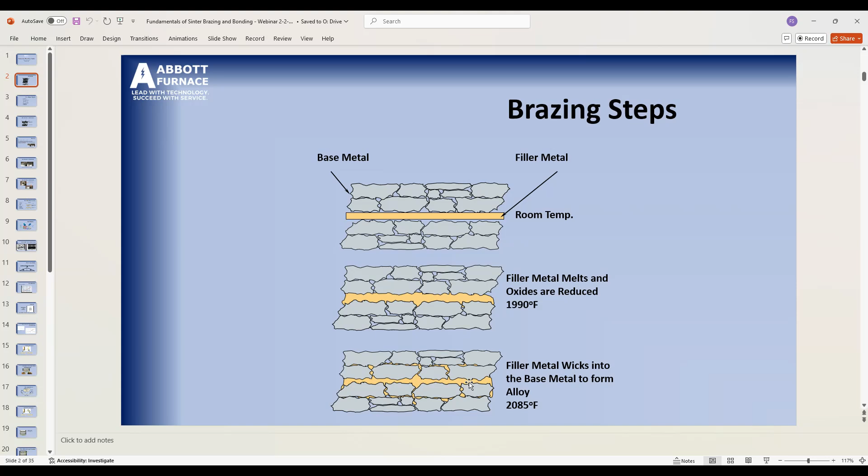So we're going to talk about sinter brazing. If we talk about brazing, there are basically three steps that happen. The first thing is you have your base metal—these would be the two components you're trying to bond together. You put a filler metal in, either on the edge or directly between them. Then you raise the temperature. Typically, once you hit about 1990, 2000 degrees, depending on your filler metal, it starts to melt and flow in, forming a metallic bond between the two base metals and giving you a good structural bond.

But there are some key aspects to brazing, whether it's conventional brazing or sinter brazing—fundamental things that have to be in place to get a good quality braze. The first thing is cleanliness. If any of you have soldered copper pipes together before, done some plumbing at home, you know the first step is you have to clean those pipes. If you don't clean it, when you heat that solder, it won't flow in.

The filler metal—like the solder, in this case typically something like an AB72—when it melts, it won't flow over dirt. It's really important that we clean the components. If parts come in with oil on them, or a rust inhibitor or anything like that, oftentimes the filler metal will not flow over that. So you have to be sure that the parts you're trying to braze are clean.

Then secondly, is the filler metal selection. In the case of sinter brazing, there are other metals out there that you can use for a filler metal. The workhorse in the powder metal industry is AB72, short for Ancorbraze 72, from North American Hoganas. But Hoganas has their own version, and likewise Kymera has filler metals. You can get them in powder form and compact them, or blend them with something to form a paste. So there are different forms of these filler metals: solid, powder, or paste.

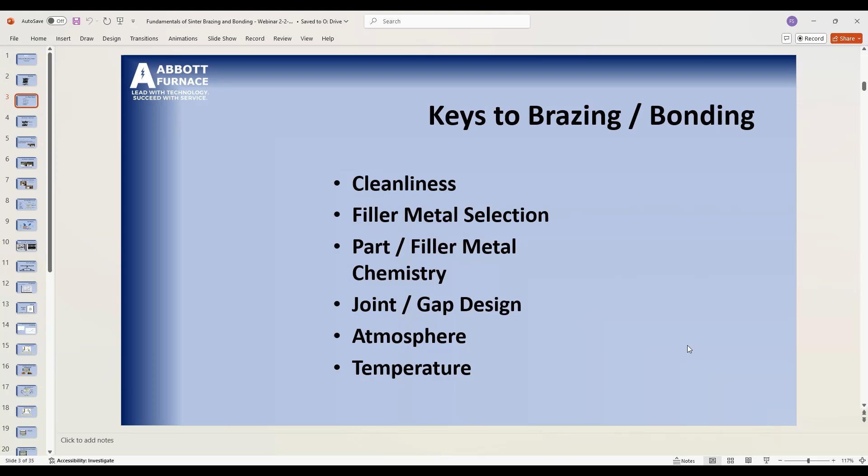And then atmosphere and temperature. Those are naturally critical to the sintering process, but they're also very important when it comes to the brazing process, because we have to not only clean the part from any oils or things, but before we can get that metal to flow across, we have to remember that all metals have oxides on them. So we have to clean those oxides off using the atmosphere in our furnaces to have virgin metal on our components that we want to join, as well as on the filler metal. Filler metal has some oxides on the surface as well. So we want to clean those oxides off so that everything is virgin metal and we can flow through that gap efficiently.

So it's really important that we have a clean surface. Surface contaminants will prevent that filler metal from reaching the base metal and forming a bond. It acts as a barrier, and it won't allow us to do that. So we have to clean that.

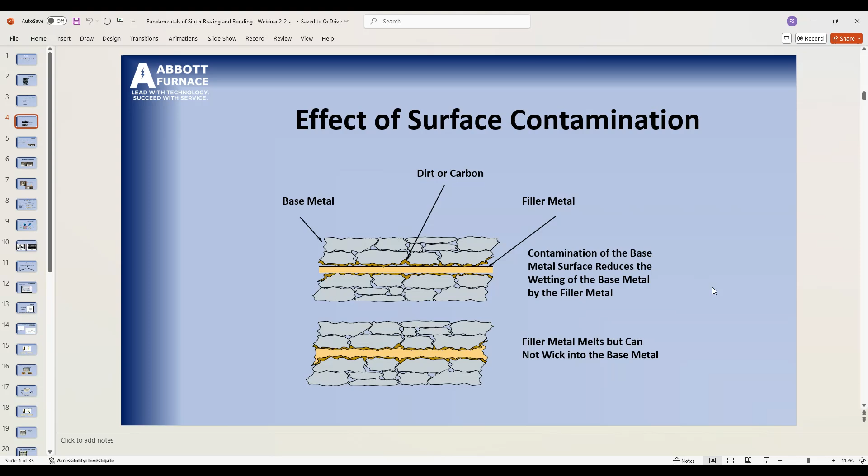And the thing to remember is we have lubricants inside of our parts. We have Acrowax, that EBS, ethylene bis-stearamide, is Acrowax. You have your Intralubes, Ph.D, Intralube E. There's a lot of different lubricants used in conventional PM. Well, what's unique about all of them is once you get above 1,012 degrees, or 545 C, the lubricants will actually dissociate.

To put this in perspective, I always use my pasta model. Your lubricant is a hydrocarbon, made up of all these different hydrocarbon strings. You can think of it like a big ball of spaghetti that's all wrapped up. As you heat it up, above 260 degrees C, they start to break down. So imagine if I had a pasta noodle, like a lasagna noodle. It's big and flat, made of flour and water.

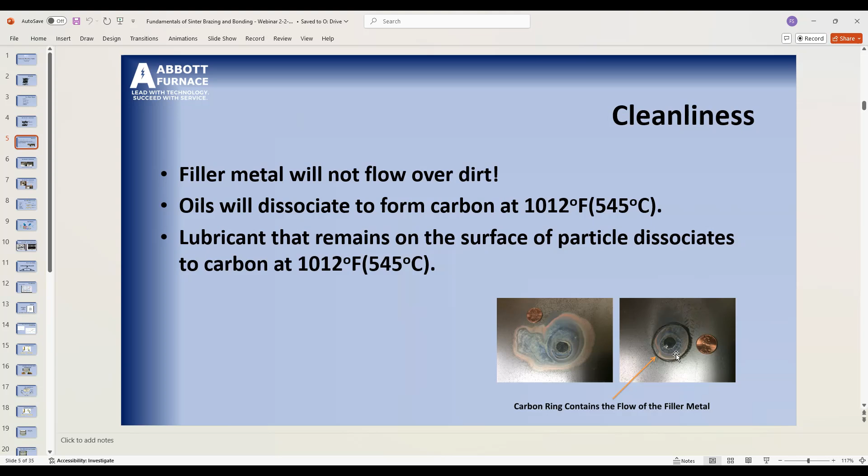And here, this is blown up a little bit. You can see a little bit better how that carbon ring stops the flow of that filler metal. You can see it went right up to it on the right-hand side there, but it wouldn't go over it.

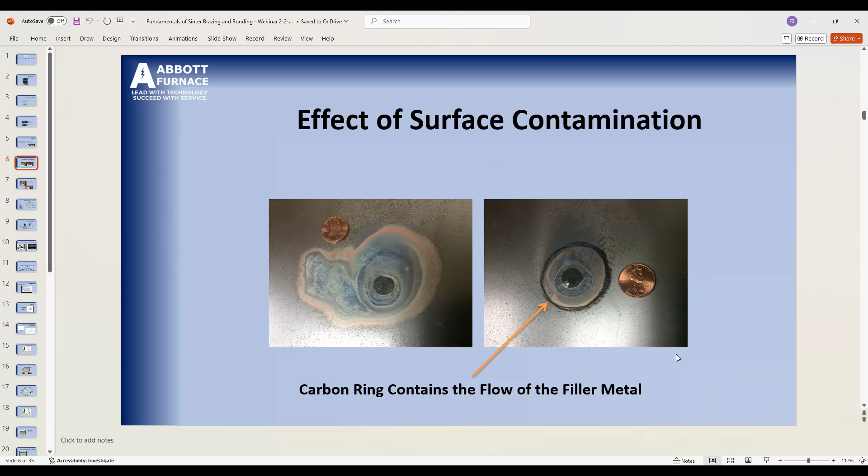And I also did this on a powdered metal part, okay? And so you can see here, I have a ring that's drawn kind of away from that pellet, and then one that's right up against it. And if you notice, the one that's right up against it, the filler metal actually humped up when it melted. It wouldn't cross that carbon ring.

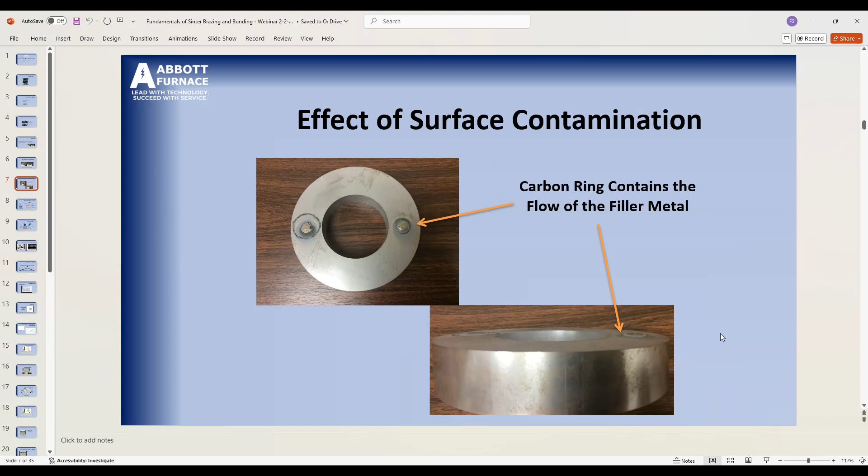And so it's really important to get it clean, but also we have to remove any oxides, because when we talk about oxides, imagine if I had a plate, a ceramic plate, on the surface of every one of our components. And so there's that plate in between. I'm not going to bond the metal, right?

And in actuality, that's what we have. When you have iron oxide, or a porcelain plate that you eat off of, it's just made of oxidized silicon, right? Silicon oxide, and so that's glass, right? And if we have any metal, it will oxidize, or most metals I should say will oxidize, and you have that thin layer on it.

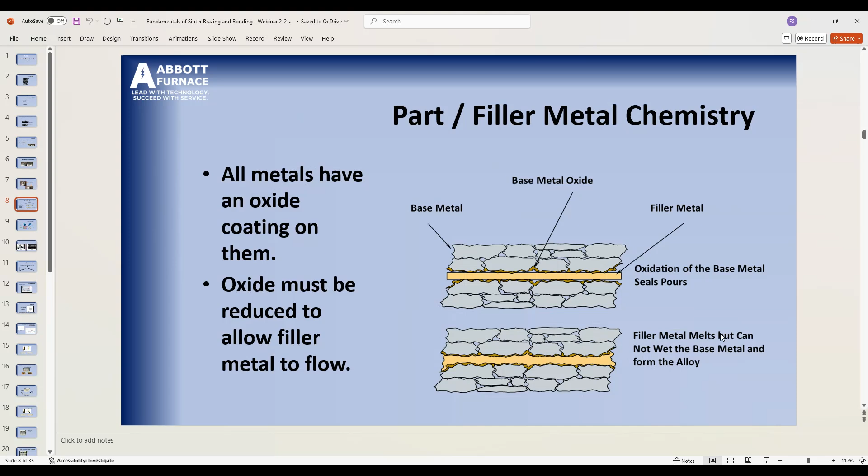And so we have to remove that oxide layer to allow that filler metal to touch the components and actually form the bond. So what we do, the way that we get rid of that oxide, is we typically use a gas that contains hydrogen, okay? And the hydrogen comes in, and we want the hydrogen to want the oxygen more than what the metal does, okay?

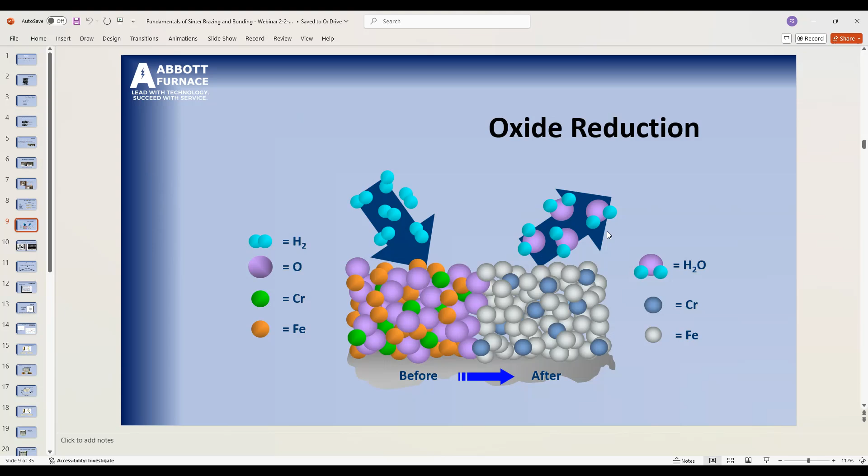And so we can clean those surfaces by reducing the oxides. And so often in our furnaces, or in our processes, we talk about dew point. And dew point, the dew point you need, depends on the chemistry of the metals, right? And what this is - I don't want to get into the weeds of free energy and all of that - but the gist of this is, if I look at these lines that represent the energy associated with the oxides...

What you find is the lower on this graph you are, the more stable the oxide is. So the more the metal wants the oxygen. So that means we have to have a lower dew point to reduce chromium oxide than we do to reduce iron oxide. So on the right-hand side here, you can see regular carbon steel is actually easier to clean up than, say, a stainless steel that contains the chromium.

One important thing to note: a lot of people in stainless steel look at this graph and say, well Steve, you tell us all the time you'd like to see a minus 60 Fahrenheit dew point, but this tells me I really only need minus 50 if I'm brazing at, say, 2050, or sinter brazing at 2050. Well, that's true if we're willing to accept that we're going to clean and try to bond all at the same time. And that's not really realistic, right?

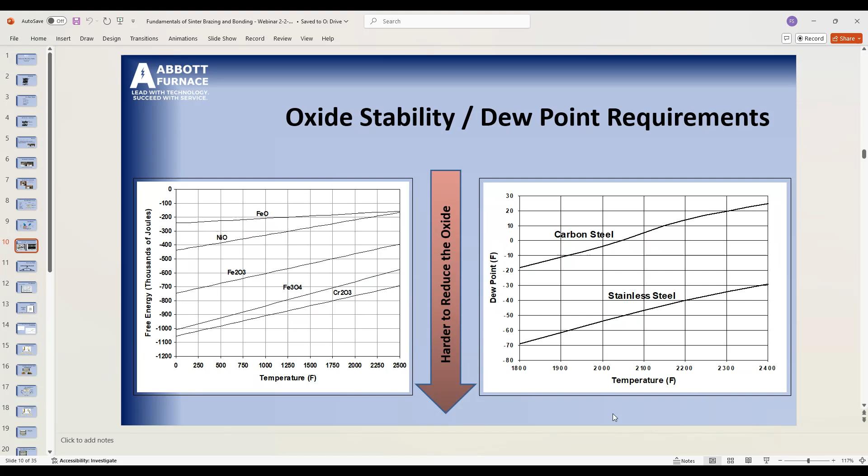So now if we come back over here and say, well, I want to start cleaning my surface while I'm heating up, I want to be at like a minus 60 to give myself time to clean up before I hit my brazing temperature. So that's why you see that. If you look in the literature versus what is used in industry, that's the reason, that's the difference.

We have a question that came in asking if the oxidation of the filler metal is a concern. It is, and just like on the surface of the base metals, we have to be cautious and cognizant of any oxidation that is on the filler metal itself. What's nice though is in the case of like AB72 or copper, they will reduce similar to what the base metal is going to reduce. So it is a concern, and if you have a filler metal that's really heavily oxidized, it could cause a problem.

So if we come back to the actual reactions that happen, the way we make sure we're going to clean that base metal and that filler metal is we want to be on the right side of the reaction. If we look at this, say we have iron oxide — it could be any metal oxide — and we bring hydrogen in. What we want is for the hydrogen to steal the oxygen, form water, and leave behind the clean metal. We have to remember that reaction can go either way.

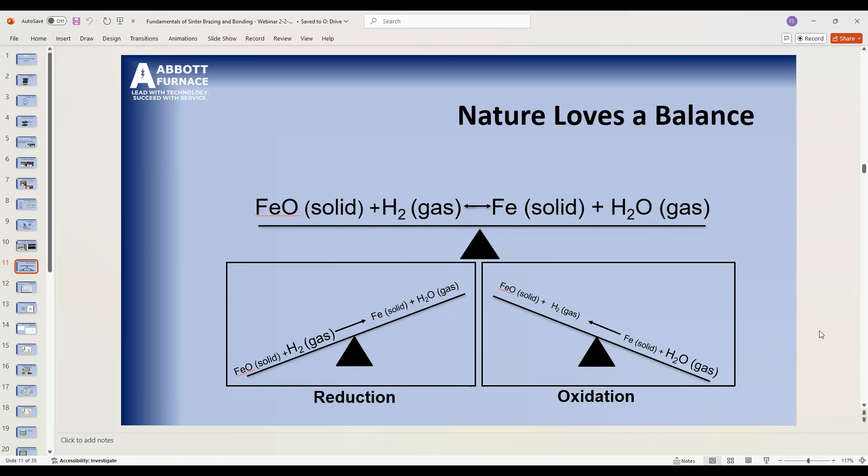Okay, so now let's talk about gap. We want a really dry atmosphere, just like we would for our sintering process. But what gap do we want?

Well, if we look at the capillary, or when you put a straw in a glass of water and the water crawls up the straw, you notice if you put a big straw in, it doesn't crawl up as high as a little straw, because you have to lift. The bigger the straw, the more weight you're trying to lift using the surface tension. Well, that's what we're looking at.

If you look at the size of the pore, our porosity versus the gap size, and the tendency to pull it through, our tendency to pull that filler metal through, that's this blue line, and the volume you're trying to pull through, or the weight, is the red line. What we want to do is notice right here where it crosses is right around 0.002 of an inch. That's your optimal gap.

2 to 2.5 thousandths will give you the most amount of filler metal with the fastest pull. Once you get a larger gap, you can't pull it through. I've seen people design around a 5 thousandths gap and get away with it -- you can get away with it if you have the time and everything's perfect.

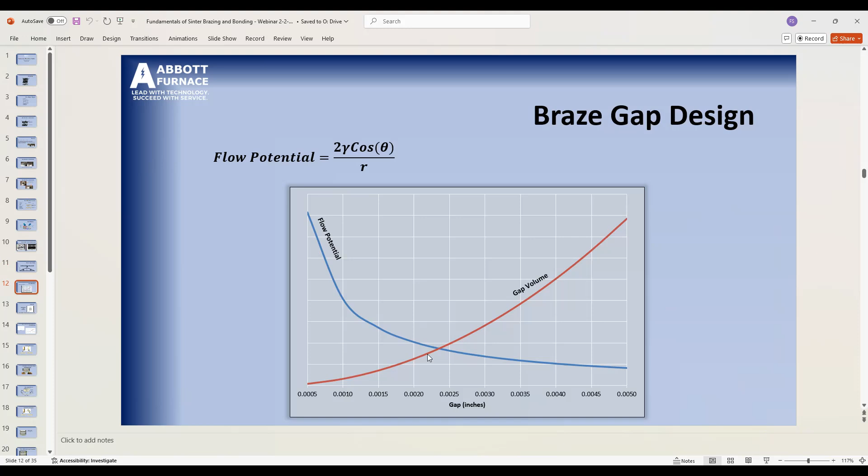But once you get above that, they start to have short shots -- they can't pull the filler metal through the gap, so they don't get a good braze. Or if they're too tight, there isn't enough filler metal there to actually form the bond. So my optimal is about 2 thousandths.

The way we calculate how much filler metal we want to put on there is we calculate the volume of this gap. So if I had a piece sitting down inside of a sleeve, I would calculate this gap, but I have to calculate it at the brazing temperature. So if we're going to braze at 2050, take into account the expansion of all the components -- that gap's going to be bigger than it is at room temperature.

Calculate the volume of that gap, and then add about 50%, 1.5 times, and that will ensure that you have enough filler metal to flow in and give you a good bond.

And the reason we want extra is, when you look at a really good braze joint, you see these fillets on the ends of the braze joints. You want to see nice fillets -- they're not what gives you strength, but it tells you that it pulled through and gave you a good bond inside. The other thing is, do not put filler metal on both sides of a gap, because then you don't know if it pulled through.

Because you're always going to have some left on each side, only put it on one side or put it in the gap, and that way you can see if it pulls out to one side or maybe both.

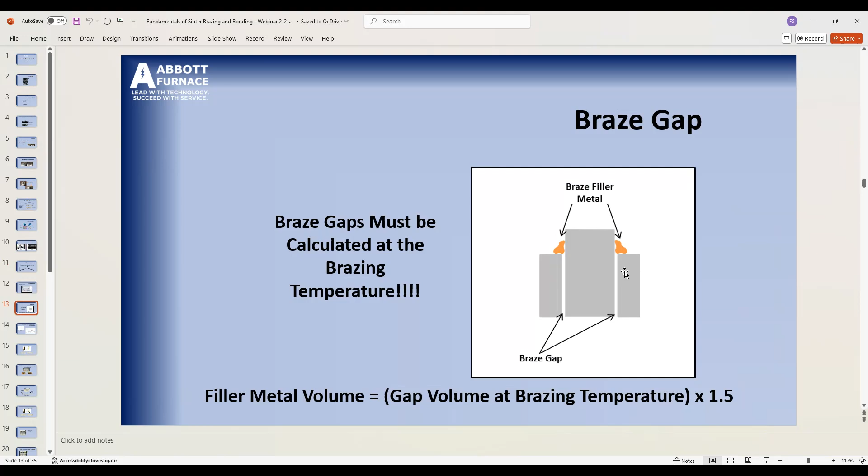So how does this relate to our compact density? Gap is important when we put the parts together, but in sinter brazing we have another problem: all the porosity in our parts acts just like little gaps, and it wants to steal the filler metal away. So how do we keep that filler metal from going into the gap but not infiltrating the part?

What we have to realize is as our density goes up, the pore size goes down. As the pore size goes down, it wants to steal that filler metal even more. That flow potential goes up, right? So smaller pores, higher density, means that part wants to steal the filler metal from the gap.

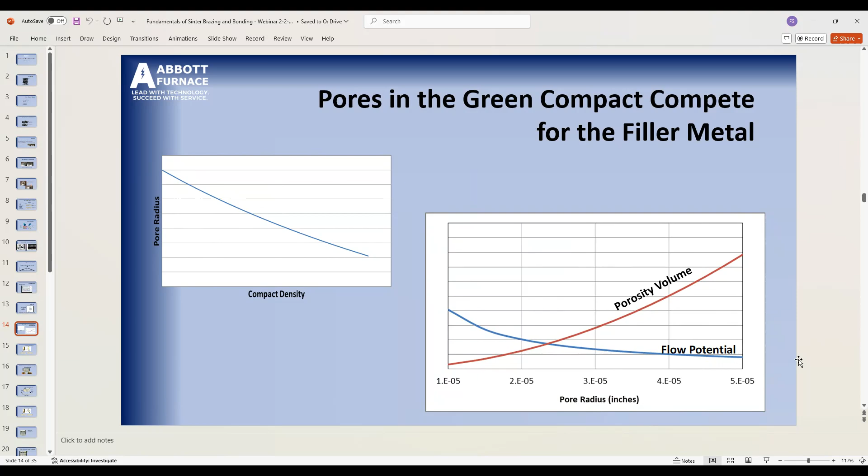So how do we stop this? If we look at this plot of flow, its tendency to steal versus the volume, at a real high density we're down here. So it's really not going to steal a whole lot, but it's got a pretty strong tendency to flow.

Or the capillary action is pretty high. But down over here at our 6.5 or so, the tendency is low, but there's a lot of volume in that porosity that you can fill.

And so what that means is, in a conventional process, you'd look at it and say that's not a big deal, it's not going to happen that fast. But you're going to sinter, so we're going to be at this brazing temperature and sintering temperature for like 20 to 30 minutes. We've got all the time in the world for it to suck all of this filler metal in.

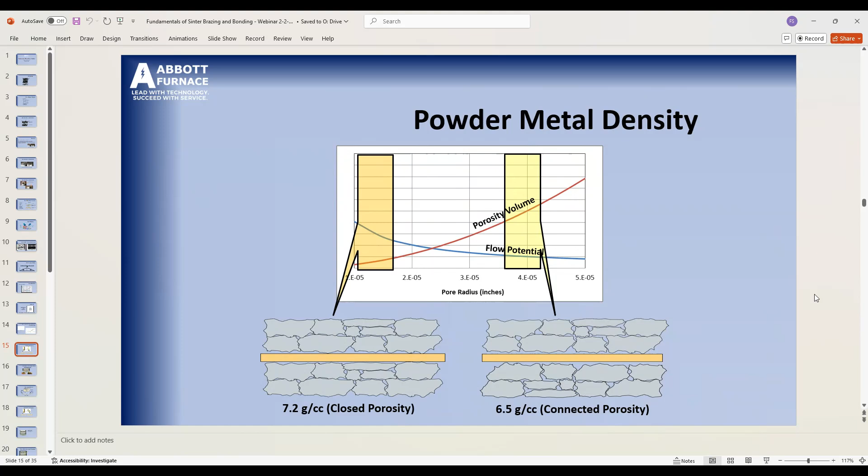So our density is important. We don't want a real low density because we've got a lot of time where it can steal it. We'd like to have higher densities so that it fills the surface quickly and holds the rest of that filler metal in the gap.

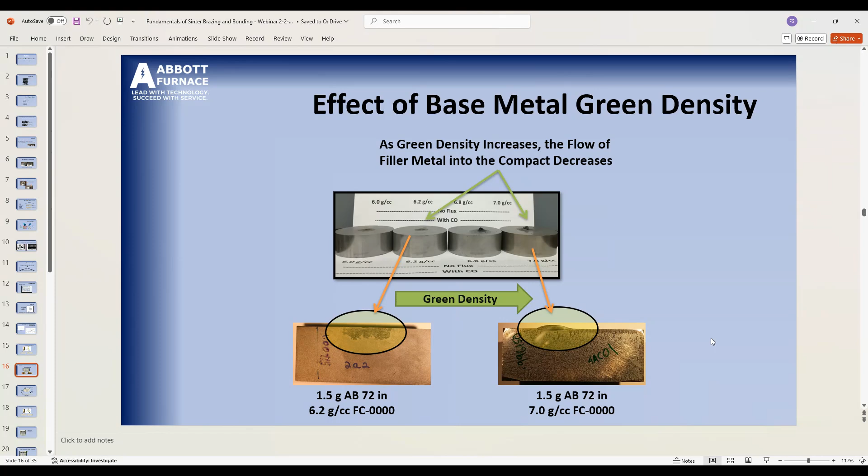Also, we can play a game with the atmosphere. We cleaned up the surfaces, right? Cleaned the oxides up, everything, made sure it was all clean. But if you talk to a lot of old timers, they'll tell you you have to have endothermic gas to sinter braze. Well, not really.

The reason it works is if I have material coming in here at about 1,010 degrees Celsius, endothermic gas contains carbon monoxide, CO, about 20%. CO, when exposed to iron at that temperature, the carbon will actually deposit onto the surface and carburize the surface slightly. So by putting a little bit of endo in there, because you've got a pretty stable gas and you're trying to carburize, it only puts a really, really thin film of carbon on the surface.

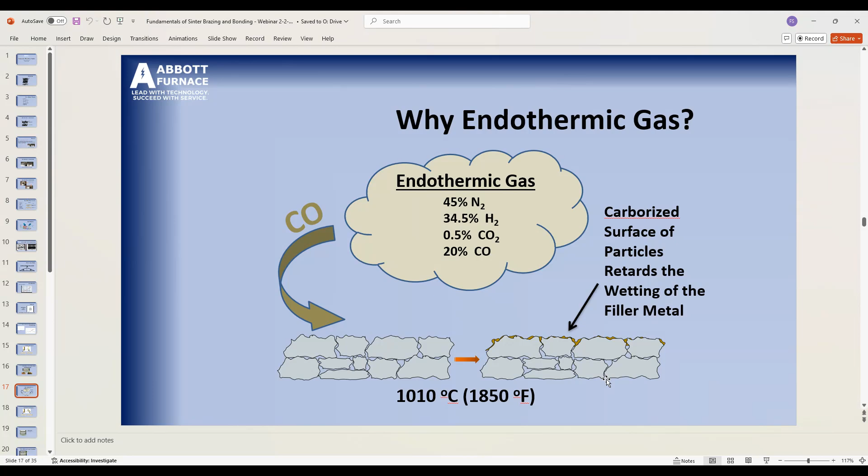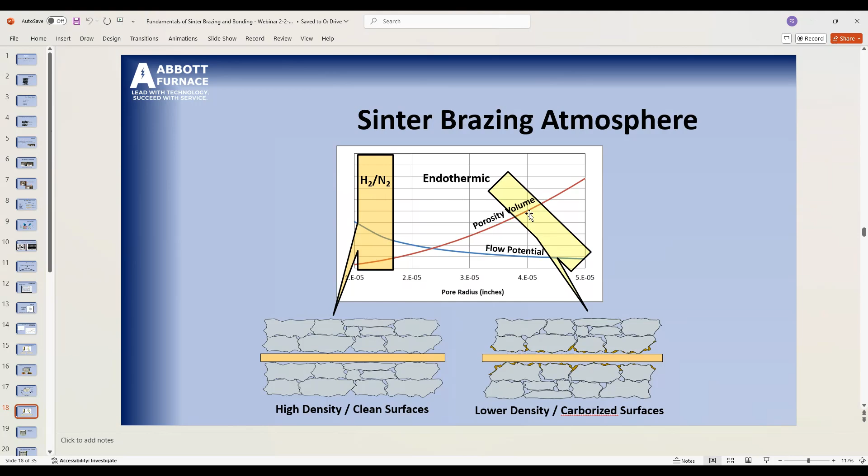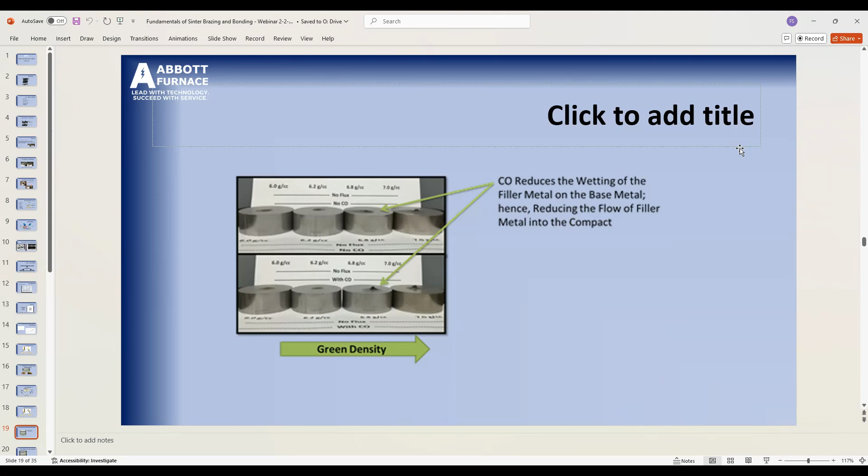So if we look, what we basically have here is, excuse me, sorry, we have CO present.

Okay, above here we have no CO, and you notice how it infiltrated, and then at a 7.0 we didn't see a lot of infiltration. As soon as we put that CO in the atmosphere, look at how you can already see remnants of the pellet, and at our 6.8 we were able to stop it from infiltrating.

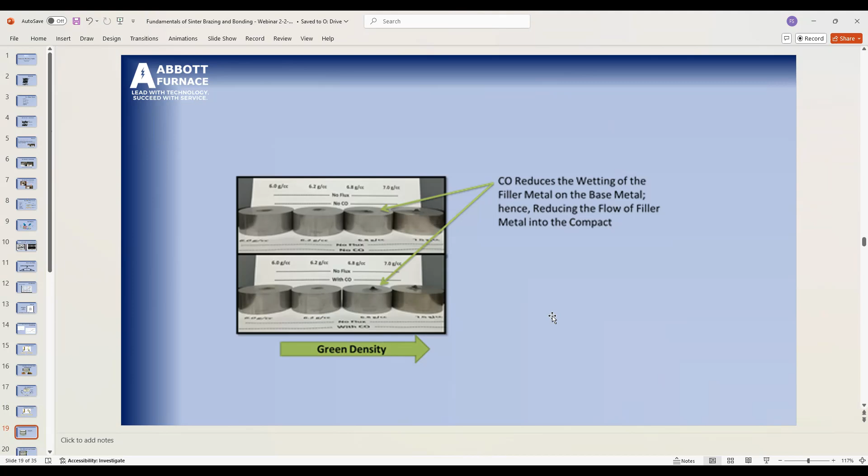So now we don't have to be molding to a 7.0 to successfully sinter braze. We can mold to lower densities and still successfully hold that filler metal at that joint. Same thing here, CO helps us. Also notice there's no flux in here.

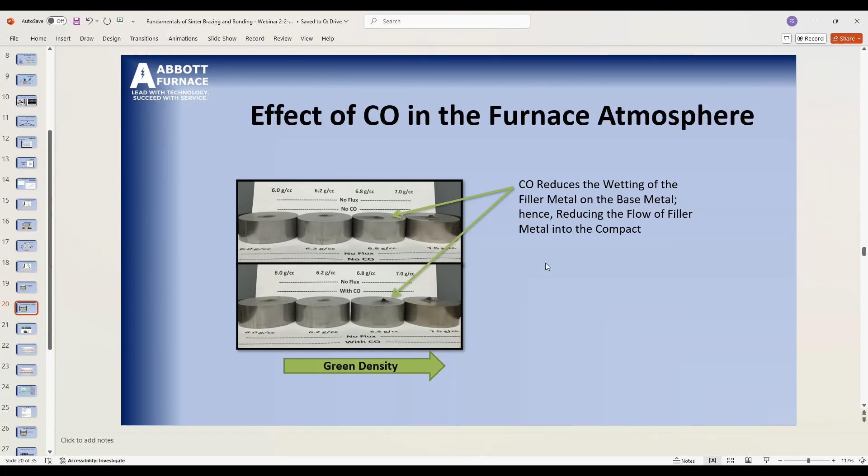Now what some folks who sell the filler metals will do is add something in there that likes to get the oxygen and help clean the surfaces. Don't use that, because what it does is make the pores so clean that you start to lose control.

Just to prove that it is carburizing and not cleaning -- if you read some of the literature they'll tell you it's cleaning. No, it's not cleaning. The CO comes down and actually contaminates that surface, causing it not to flow.

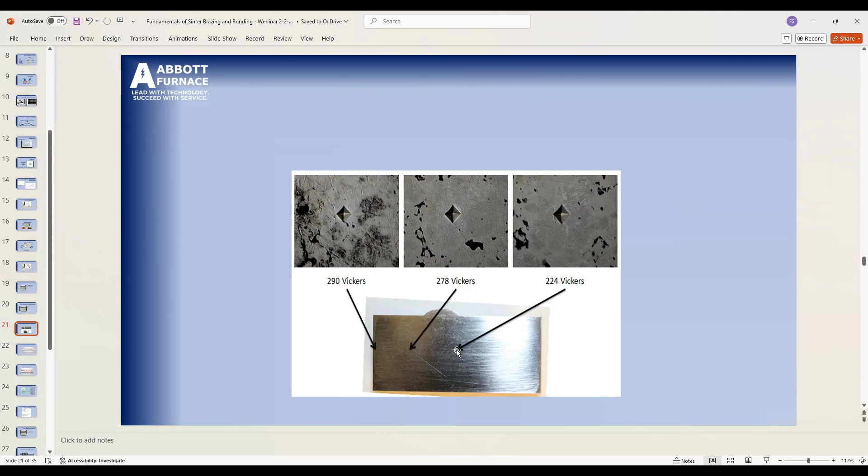So here we're looking at hardness from the surface as we go in. It should just be a surface thing. Notice we've got a 290 Vickers on the surface. We come in slightly, it's 278. We come in even further, it's 224. The amount of carbon we pushed in there keeps going down. So we really did stop it from flowing by carburizing the surface slightly.

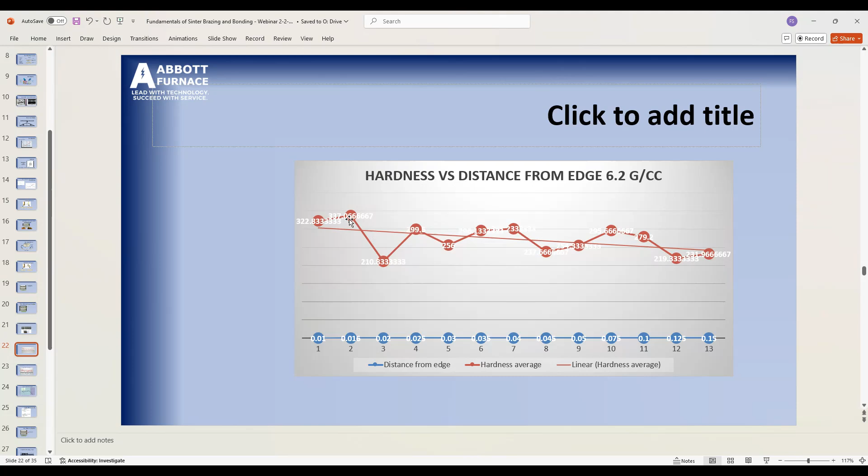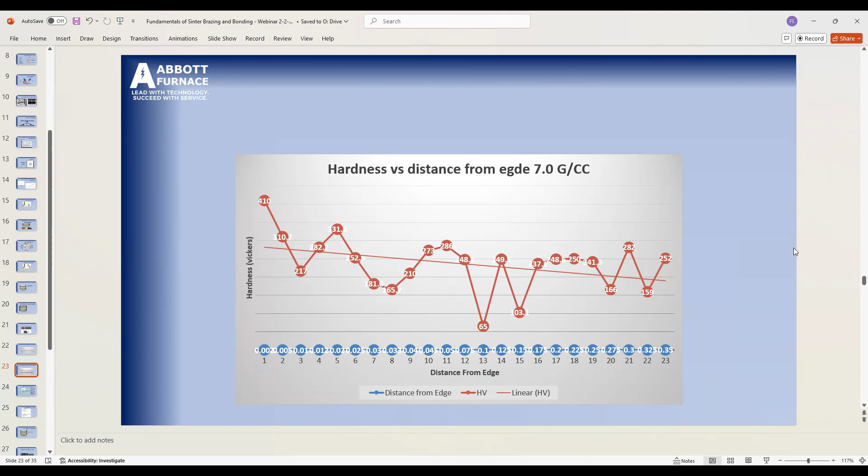Here's more data on that. This is the distance -- if we go from edge to center, you can see the hardness values as we go through. I apologize, these shouldn't be there. This is the same for the 7.0. So we're seeing 6.8, 6.2, 7.0 -- we're seeing that same variation in hardness.

Now this is the money graph -- this is the one that really shows us what we want to be doing. What we're looking at here is filler metal infiltration, how much was stolen, versus different conditions. The first one is hydrogen and nitrogen, with flux in that filler metal. Notice it doesn't matter what that density is, we're always stealing the filler metal -- it just keeps going up.

What we really want is to be in this range down here where we're not stealing it -- it drops off. If we look at this black line, which is hydrogen, nitrogen, and our CO, which causes the carburization, with no flux like I mentioned, notice once we get above a 6.9 we don't lose that filler metal. There's little to no loss of the filler metal at the gap -- it holds it right there, so what we put on there stays and we can use it.

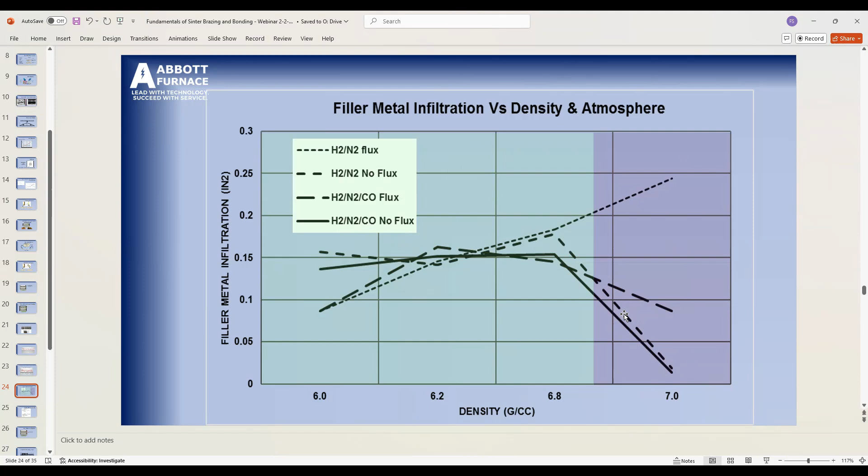Now, as we go up, you see that if you have the flux we lose a little more, but if you have the CO it works a little better than just having hydrogen and nitrogen by itself.

And why do great big pores not work? If you look at it, why do we lose control when we're at 6.0 where we have big pores, low density? Well, because if I have a real low density, the pores are great big -- I don't have enough viscosity of that filler metal when it melts to fill the pore. It wants to fall into the pore and fill the bottom like it's a sewer.

So now the only thing that pulls that filler metal through is the contact with the pore surface. Instead of filling the whole pore and pulling all of that filler metal through, when I have a large pore I only have a small amount. So even though I'm carburizing, even though I have flux, doing all these things to try and control it, I don't have control because the viscosity of my filler metal is overriding all of the tools I have.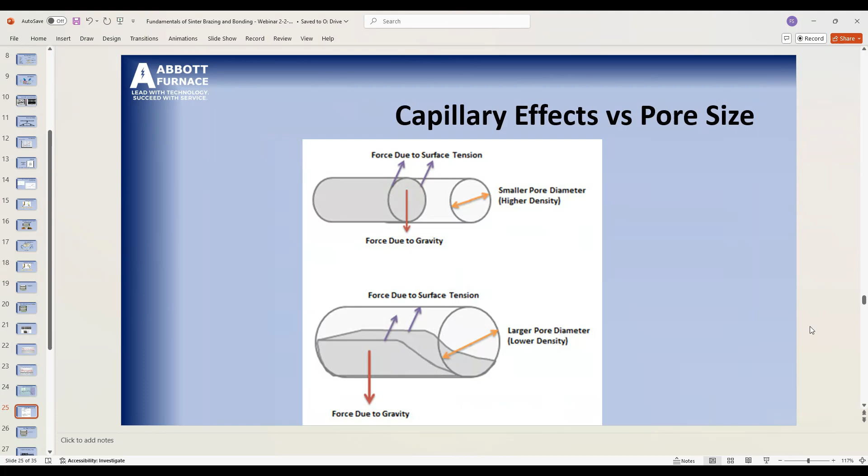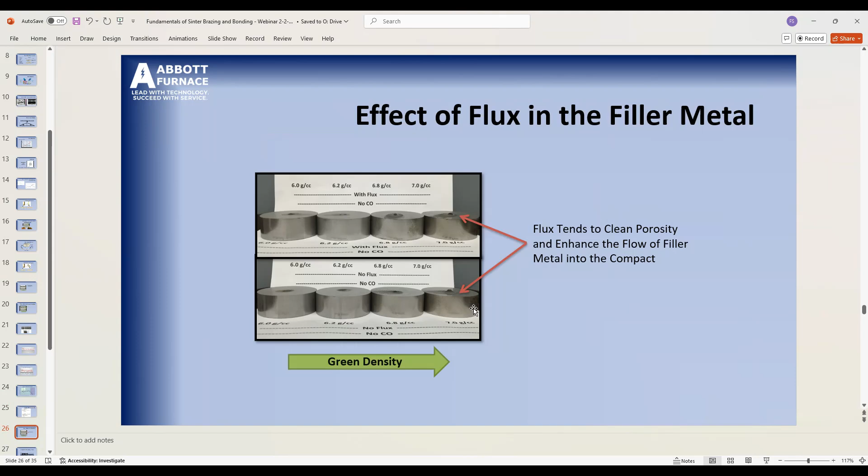So we want to be high in density so that we have control of where that's going to go. With flux, you notice we infiltrate all the way up through, and we even have some infiltration at 7.0. But if we take the flux out, it holds it at the surface at the higher density like we want. So don't use the flux.

So now let's relate this to our sintering process. We've talked about brazing, the gap, having a clean part, controlling and getting all the oxides off the part. We've talked about putting a real thin layer of that carbon in the pores and in the joint, so that there's still enough capillary pull through the braze joint, but the pores no longer have that real strong ability to pull it, to steal it. So we control the gap and the chemistries and all of that.

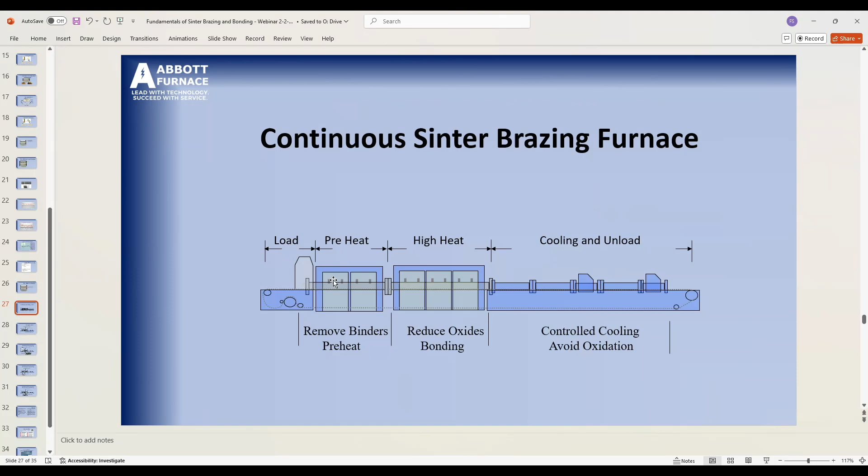And cleaning the oxides. Now let's relate this to our sintering process as well. I have a schematic here of our furnace, with our load, our preheat, our high heat, and our cooling section. In the preheat, the first 2/3 is where we remove all the lubricants from the compact. Then, from 2/3 of the way into the preheat to about the beginning of our high heat, that's where we're going to reduce our oxides.

But that's also where we're going to hit that 1850 mark, our 1010 degrees Celsius. That's where we're going to start to carburize that surface to keep the base metal from stealing the filler metal. Then we're going to melt. But notice, in normal brazing, we'd heat up, hit the melting point of the filler metal, stay there 2 to 5 minutes, and cool off. Here, we're going to heat up to our sintering temperature. Everything's going to melt, but we're going to sit there for 20 to 30 minutes, so there's all the time in the world for that part to steal that filler metal. That's why it's so important to control the cleanliness of those pores and control that density so that we don't steal all the filler metal from the gap and not join our parts.

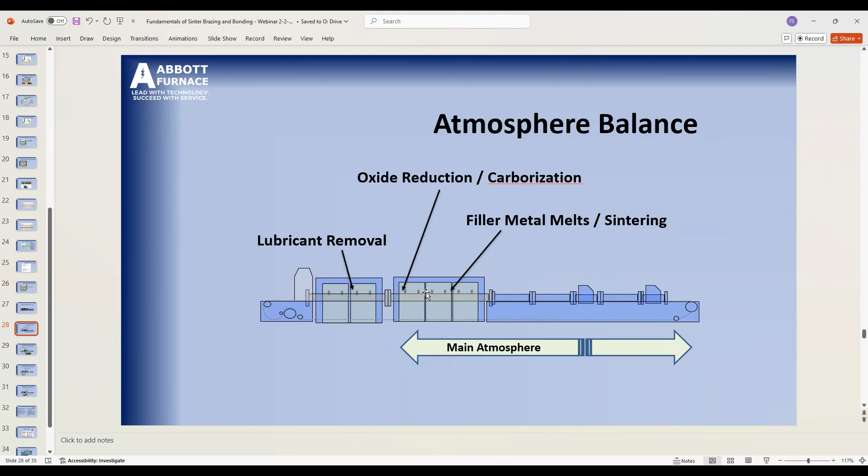So here it's really important for us to remove the lubricant. But we have to remove it in the right way, because if we heat up too fast and that lubricant comes to the surface and into our gap and dissociates, we're going to form dirt. We're going to form soot, and then we won't bond because the filler metal won't flow in there. So in the sinter brazing process, lubricant removal is critical.

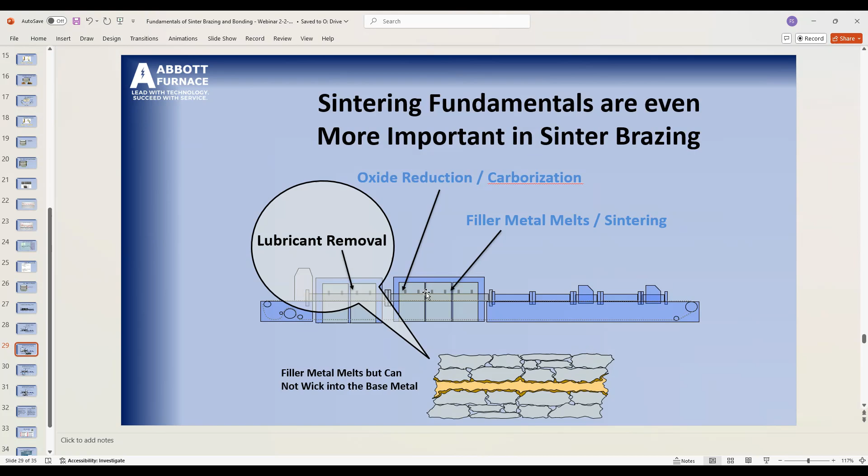So really pay attention. We want to stay below 1,000 degrees Fahrenheit, or below that 545 C, for as long as we can. In this case, we want to be at 6.9 to 7.0, meaning we want to be in the delube temperature, above the melting point of the lubricant but below 545 C, in that window for actually 35 to 40 minutes, because it takes time for that lubricant to come out and vaporize. We've had other webinars and papers if you want more information on how to remove that lubricant, but it's really critical you do it at a low temperature.

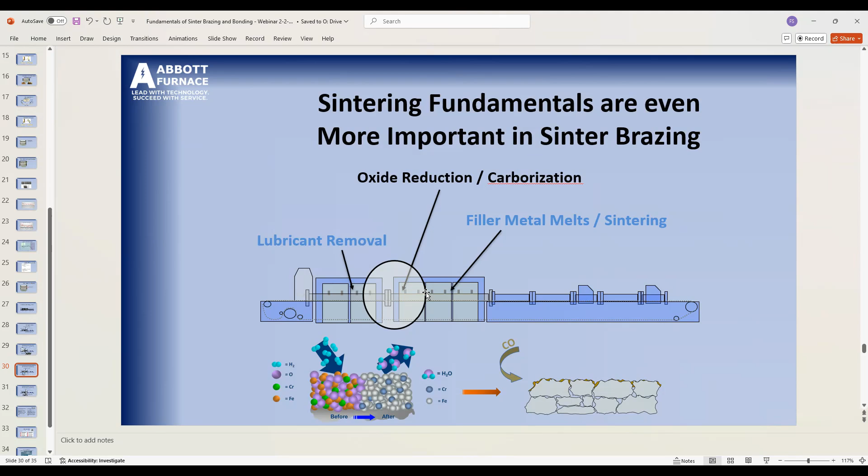And then, like I say, we have to reduce the oxides, but then we're going to come back in at 1010 C or 1850 Fahrenheit, and we're going to inject some gas in this location that has CO in it, to help us contaminate or dirty up those pores just a little bit—not enough to deter the sintering, but just enough to deter the capillary from stealing all of the filler metal from the gap. Then finally, we're going to go up to our 2050. Now we should have everything set—we've cleaned the surface, we've reduced the oxides.

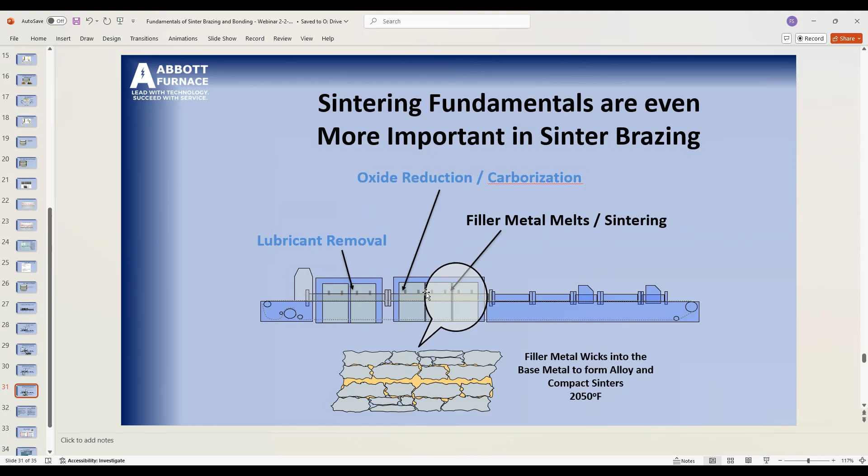We've prevented the base metal from stealing the filler metal from the joint. And now it flows and we form the metallic bond.

So in summary, the key things are: lubricant removal and surface cleanliness are critical. We have to reduce the oxides on the surface of the filler metal and the base metal. The filler metal must be in contact with the gap. Do not use a flux with the paste or use a flux with the filler metal.

Gap size must be calculated at the brazing temperature. Compact density must be 6.9 or greater grams per cc for an iron-based system. We want to carburize the compact surface to limit the flow of the filler metal into the compact, so we hold that filler metal at the joint.

One thing that's really important - everybody thinks that you can only use special grades like AB72 that you're getting from different places. You can use copper, you just have to make sure all of these steps are in place. If you have a 6.9 density and you're cleaning everything up, getting the lubricant out before it can soot, and doing all the things we've shown here, you can use pure copper to Sinter Braze. We've done it.